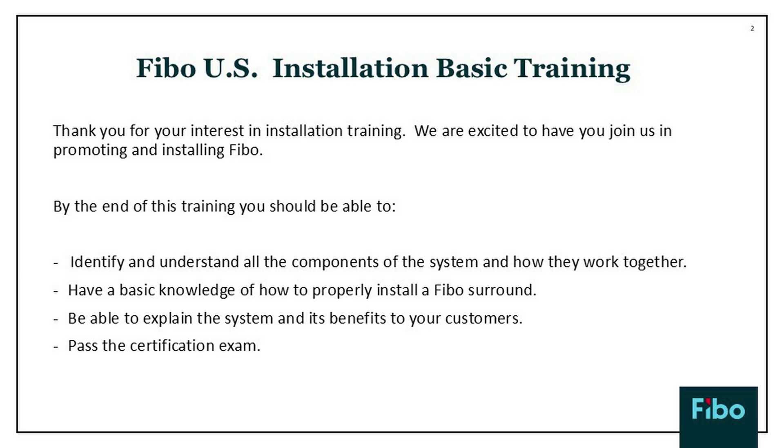My name is Tommy Ellis. I have been the Installation Training Manager for Fibo for North America for about the last 4 years. My experience is in building materials, sales, and installation, and I was also a general contractor in California for 15 years with a focus on kitchen and bath, with experience in all the associated trades.

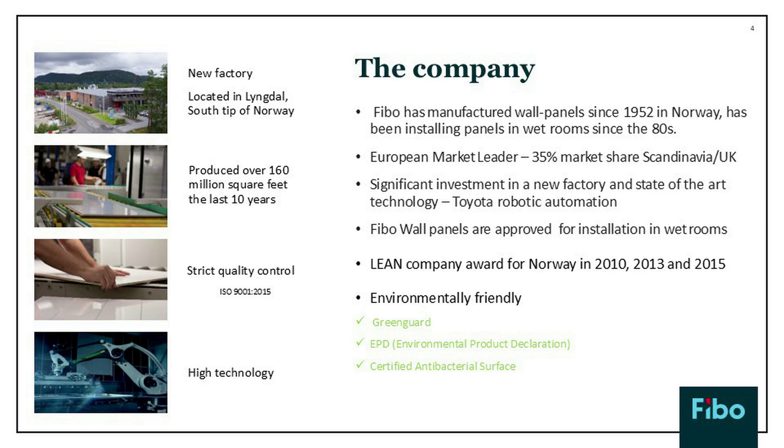Fibo has been manufacturing panels since the early 1950s and started in the wet room space in the mid-1980s. So we have a long history of success in this space with a tried and tested product and system. Fibo is manufactured in Norway in a state-of-the-art robotic manufacturing process, which allows us to produce panels quickly with extreme precision. Fibo has won many awards, is a certified antibacterial surface, and a very sustainable, environmentally friendly product.

Fibo panels are a 3-part construction consisting of an HPL decorative laminate face, 7-ply premium grade birch plywood, and a thin laminate vapor barrier balancing backing. Our panels join with a patented Aqualock click joint and come with a lifetime residential and 25-year commercial warranty. Fibo panels are available in over 600 different colors and design combinations.

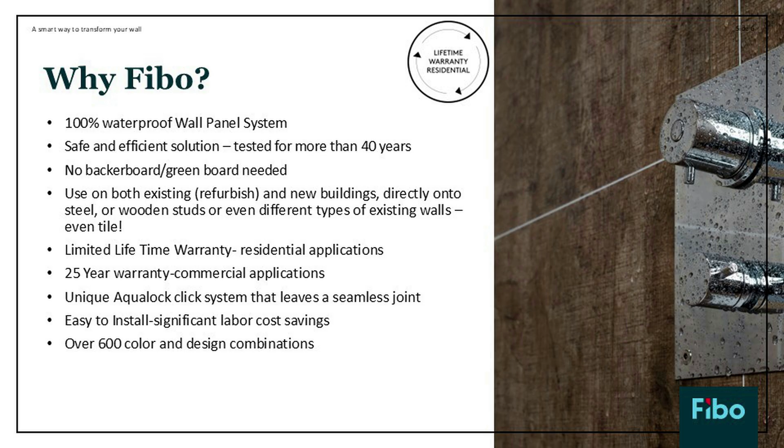Fibo is a 100% waterproof system when installed correctly. We do not require any special waterproof backing to install our panels properly, and Fibo can be installed in new construction, remodels, and over existing surfaces, even tile.

The Fibo system is a complete system. From the panels and profiles to the screws, sealant, and installation accessories, you'll have everything you need in one kit to install our panels. We do not manufacture bases, tubs, niches, and other accessories, as Fibo is designed to work with just about any other manufacturer's product on the market. If you have any questions about compatibility, please contact us and we'll be happy to give you more information.

Our product is primarily designed for wet areas, but can be used on any interior surface, such as a full bathroom wrap, an accent wall, and things of that nature.

Fibo panels are available in a few different sizes. Our standard size panel is 94.5 inches tall by 24 inches wide, available in over 600 decor, finish, and tile design options. We also make a long panel, which is 118 inches tall, available in several decors, finishes, and tile patterns as well. Our tall panel, which is 107 inches tall by 24 inches wide, is available in limited colors and design options.

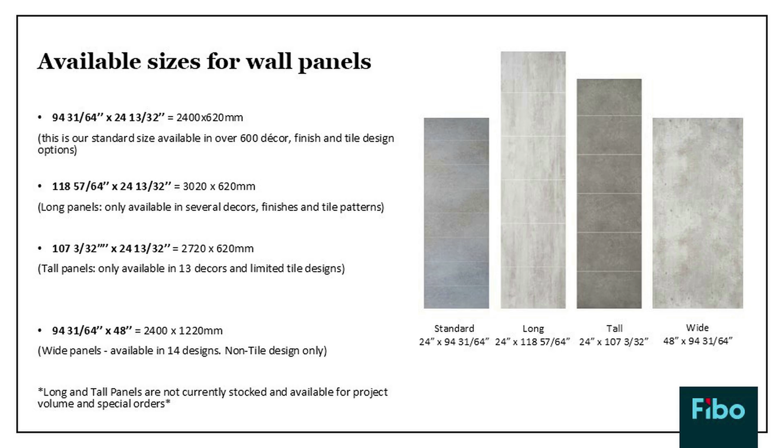Finally, we have our wide panel. This is 94.5 inches tall by 48 inches wide. These are available in 14 designs in a non-tile design only. Our long panels and our tall panels are not currently stocked, but they are available for purchase for project volume and special order. For any questions, please reach out to your Fibo rep and we'll be happy to give you more information.

We also offer a product that we call kitchen board. This is the same panel that we use in showers, cut down to 18 inches tall by the standard 24 inches wide. These panels are designed to be installed as a single course backsplash in the kitchen. If you require taller coverage, our standard panels can be cut to size and shape and used throughout the kitchen. The installation is much simpler, and a typical galley or L-shaped kitchen can be installed in as little as an hour and a half and can also be installed over existing surface.

The kitchen board itself comes in specific colors and designs, so if there is a color that is desired that we do not offer in this size, you can use any standard Fibo panel as I just mentioned and cut it to the size and shape you need. The one limitation for installing Fibo in a kitchen is behind a gas cooktop that has no flame or heat deflection. Please contact us with any questions about this and we can give you additional information.

Before we move on, I want to introduce you to a series of products that we have recently released. These products are designed for the dry room space, and I'm going to show you what these are next. The first panel I want to show you is our Vito wood fiber panel. It has an HPL decorative laminate face, HDF wood fiber core, and a balancing backing. These are standard size panels, very easy to install, and a very stylish alternative to drywall texture and paint. Next is our Vito lacquer veneer panel.

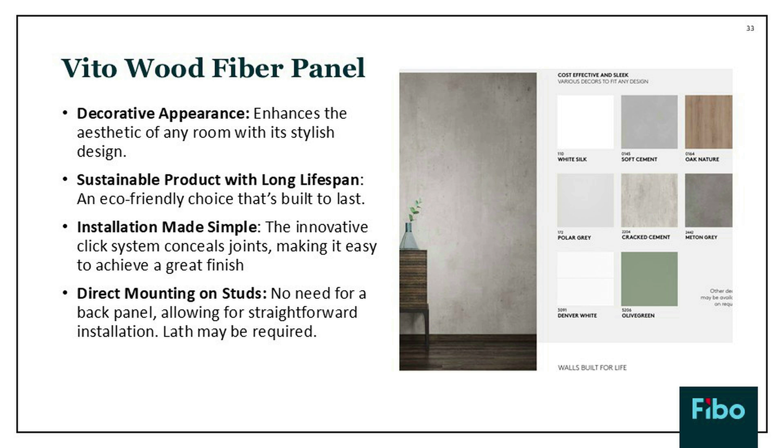These have the same 7-ply birch core as our Fibo panels do, with a true lacquered veneer face. These come in birch, oak, and very soon a light oak veneer. These are also very easy to install and provide a very clean, attractive look. These are available in 24 inches wide by 94, 107, and 119 inches.

Here we have our Vito Just Paint, and this is exactly what it sounds like. It is an HDF panel that installs quickly and easily and can be primed and painted just like drywall, in a much shorter period of time and with considerably less mess to contend with. This is a very cost-effective solution compared to using drywall, texture, and paint.

Finally, we have our Fibo Fire Rated panel. This panel carries the Fibo label because it is also suitable for wet room applications. These are 1/4 inch thick, 24 inches wide by 107 inches tall. They are ASTM E84 Class A fire rated and also rated for use in wet spaces. These are available in select decors currently.

All of our dry room products, including the Fibo fire panel, have a click joint fastening system. However, they are not to be joined or locked with our regular Fibo panels. Any product with the name Vito is only designed for use in a dry space. They are not to be used in any wet area. Our Fibo fire rated panels can, however, be used in a wet space or a dry space.

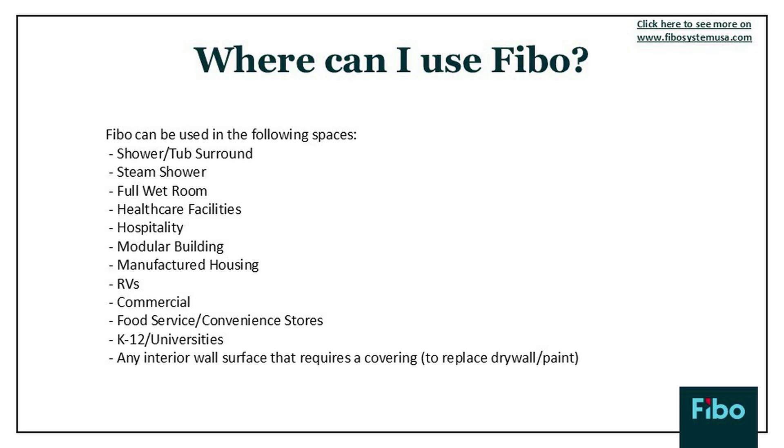If you're going to be using our 48 inch wide panels, we have created a separate video on how to get the maximum yield out of those panels, and you can find that on our YouTube channel as well.

For a symmetrical layout, which is more in line with how a tile installation would look, it will require 7 panels in an alcove of the same size. Typically, you would align the vertical grout line to fall in the center of the drain or plumbing fixtures.

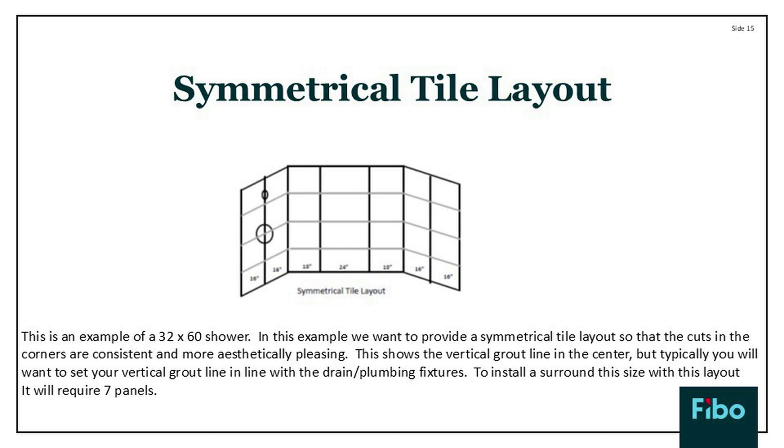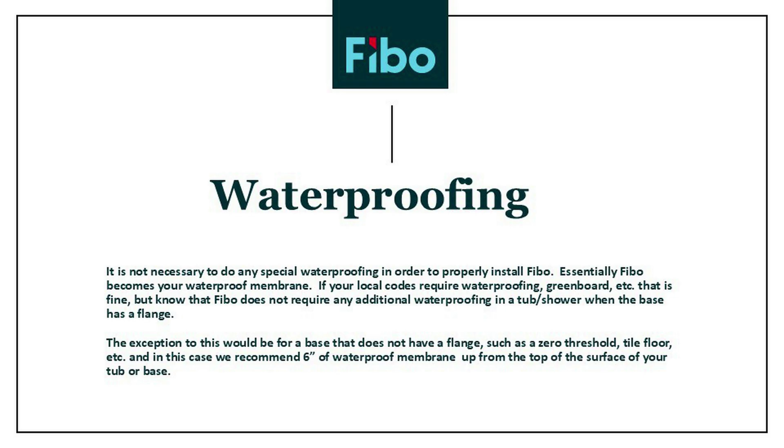Now let's move on to the installation demonstration video. This is about 30 minutes long, and it will cover all of the steps involved in a typical Fibo installation.

So what you need to get started is your Fibo panels, which come in a package of 2. You're going to start with the base profile, hidden corner profile. We've got 2 different sizes of L-shaped finishing profile, the large and the small. These come in white, black, and aluminum.

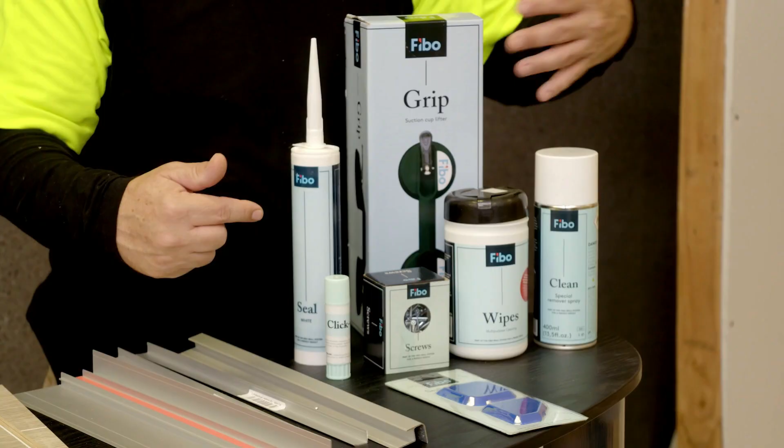If you're going to be wrapping the room and you need to go around a 90-degree corner, we've got an outside corner profile. You're going to need your Fibo seal, click wax, the Fibo screws, the cleaning products, the wipes and the Fibo Clean, our Fibo sealing tools, and then we have our optional Fibo grip.

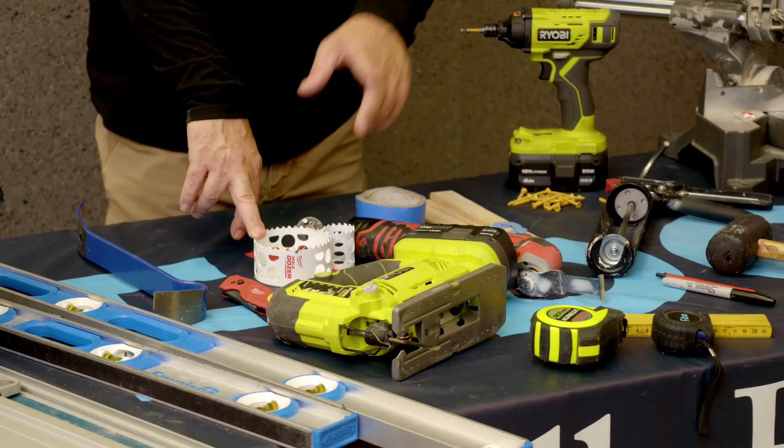To complete your Fibo installation, you're going to need the following tools. We're going to start with your saw, either a track saw or a circular saw with a 60-tooth finish blade. If you're not going to use a track saw, make sure you've got 8-foot and 4-foot clampable straight edges. You're going to need a 2-foot and a 4-foot level, pry bar, a utility knife, a jigsaw and/or a multi-tool, hole saw bits for cutting your pipe penetrations, measuring tools, marking tools, blue tape, and 2 options of shims.

We've got these plastic horseshoe type, and then we've got our standard wood type shims as well. Heavy duty caulking gun, rubber mallet, a drill with a T10 bit, and a bit for your deck screws or whatever wood screws you want to use if you're attaching OSB strips. A chop saw or a hacksaw in order to cut your profiles, and then finally any PPE, ear protection, gloves, eye protection, etc.

Fibo panels are to be stored flat and unopened until you're ready to install them. Acclimation period can vary. If there's an extreme variance in temperature from where the product is stored versus where the product is to be installed, then acclimation time can be as much as 72 hours. If the storage condition and site conditions are similar, this can be less.

Refer to the product installation guide or contact us with any questions you may have regarding this. And always be sure to inspect each panel before installing.

As it pertains to Fibo Seal, appropriate storage temperature is between 41 degrees and 77 degrees Fahrenheit, and application temperature is between 41 degrees and 95 degrees Fahrenheit. Our product data sheet has additional information.

Fibo can be installed over multiple back wall options. Today, we're going to talk about the 2 most common, and that's gluing up over drywall and screwing in over OSB strips horizontally placed across the studs. We can also go over existing surfaces such as tile, other wall surface products as well in a glue up option. That's a separate training, and we'll address that in future broadcasts.

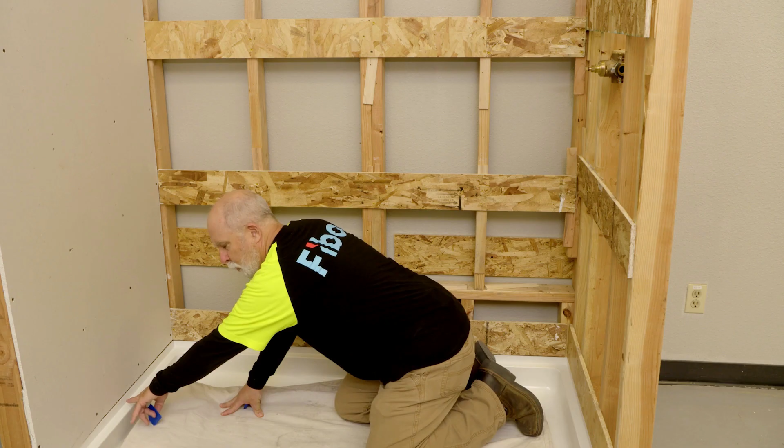When you set your drywall or your OSB strips, we want to be 1/4 of an inch above the flange of your tub or your shower pan. The Fibo sealing tool is 1/4 of an inch thick, so that makes a great spacer to set your material on top of and get that 1/4 of an inch gap.

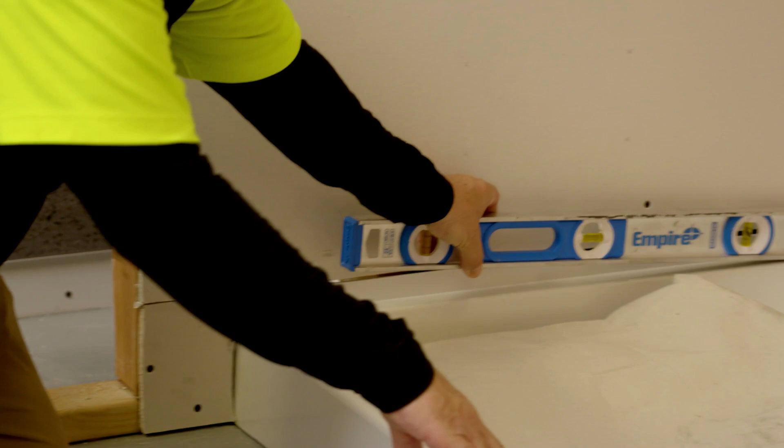First thing you want to do before you get started doing anything is check your base for level and check your walls for plumb. So we want to be as level as we possibly can. This one actually is set really nice, and it doesn't have any particular strange casting in the material either. You may run into a situation where there might be a hump or a little bit of a valley. If that's the case, you're going to want to find your highest spot and level from there.

So I'll check my 3 sides, and everything's good here. So my base is set.

So if you find any unusual outages in your walls, particularly when it's drywall, a lot of the corrections probably need to be done behind the drywall. But when we're gluing it up, if it's a minor variance, we can address that with glue.

With the OSB strips, it's a lot easier to get your walls plumb and flat by taking some shims, putting those in place in your corners, as well as in the field, making sure that everything's nice and flat. Always want to make sure you get 2 screws in each of your OSB strips.

Here we framed out for a niche. We're going to introduce a niche into this installation training as well. So I've got my bottom support, I've got my top support, and it's going to fit right in between the studs, and we'll address that later on in this demonstration.

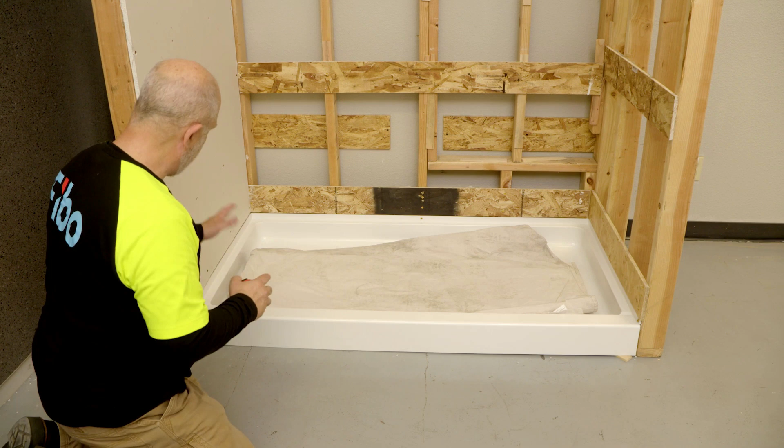Now we want to measure and cut our base profiles. I've got a couple of different options of how the Fibo is going to end. On this wall, I'm actually going to run it long and put a dog leg. On that end, we're going to stop right at the end of the shower base, but the base profile is still going to go in this installation. It's going to end at the same place in both locations, so I'm basically just going to take my measurements to the end of the shower base, and I'll take those over to the saw and cut my profiles on 45-degree angles in the corner.

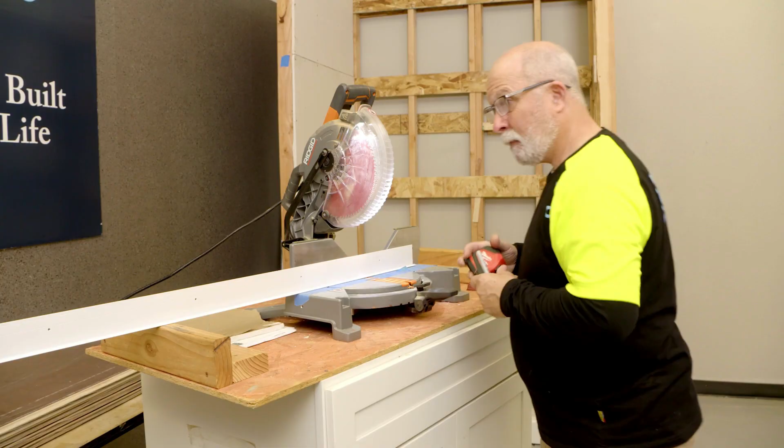Now that we have our measurements, we'll go ahead and cut our base profile. And there's my 45. Okay, so now we'll go ahead and dry fit the base profiles that we just cut, just set them in place to get started.

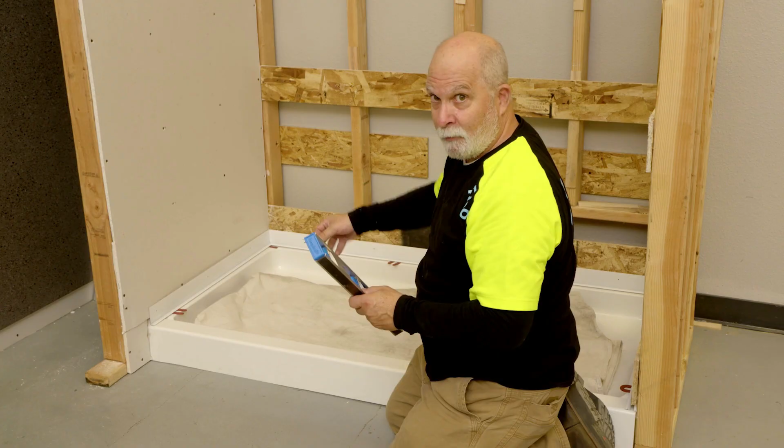We want our base profile to be 1/8 of an inch minimum off the deck of whatever surface we're working on top of. We're going to use these horseshoe shims that are 1/8 of an inch thick, and I'm going to put these under the base profile all the way around. Once those are in place, then we'll do another check of level all the way around and make any adjustments with 1/16 of an inch shims if necessary to make it perfectly flat.

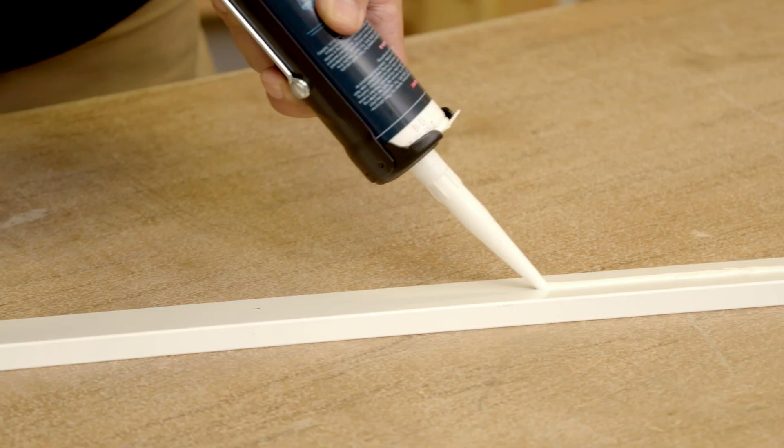After the profile's been dry fit and you're comfortable with the way everything sits, as we get ready to install it, we're going to apply a bead of Fibo seal to the back of this base profile, right below the screw lines that are pre-drilled into the profile itself. What this is going to do, in the event of any potential wicking that could happen down the road, is help prevent water from getting into the base material behind the Fibo panels.

So after we've applied our Fibo seal to the back of the profile, we'll go ahead and set it back down in place on top of the shims that we left from when we leveled out the base profile the first time, and just stick it to the wall. We're only going to put one screw in the bottom of the base profile to start, on the wall that we're starting on, and that's to hold the base profile in place.

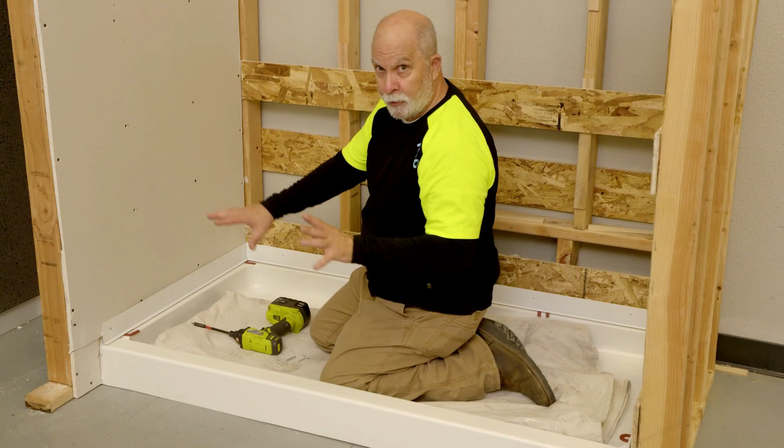Some of the instructions say to put all the screws in all at once. You'll find out as we go through the course of the installation, we're going to add additional screws through the bottom of the base profile through the panels. So installing all of the screws all at once is not necessary, and if for some reason you need a little bit of flexibility as you're going through the installation, leaving the ends of the profile loose is helpful to make any adjustments that you might need to make.

You definitely want to put your bead of Fibo seal along the back of each piece, set it back up against the wall and leave it resting on the shims, and then you can make adjustments, like I said, as you go through the course of the installation.

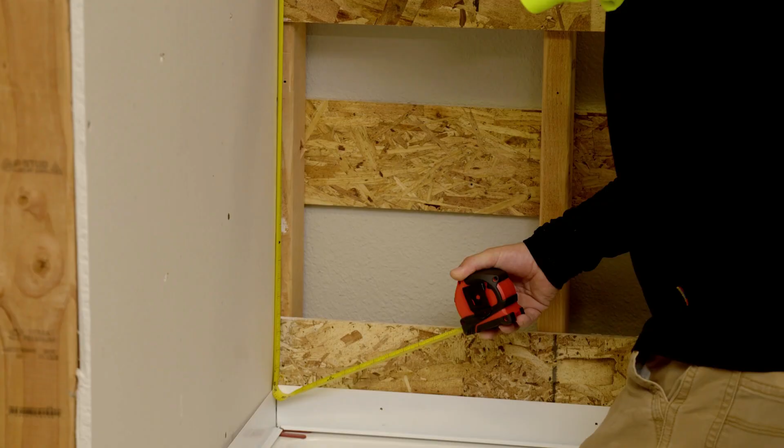Okay, so the hidden inside corner profile is going to go up next. To measure that, we're going to go from the top of our installation and measure all the way down to the top of the base profile where it sets flat on the wall. You want to take that number and subtract 1/4 of an inch. The reason for that is we want to leave an 1/8 of an inch gap at the bottom, and an 1/8 of an inch gap at the top. What that's going to do is if there's any flex in your shower pan or tub, when it moves up and down under weight, the metal won't bind once the product's installed.

After we've cut our hidden corner profiles, we're going to talk about orientation of the installation. Today I'm going to do a left to right installation, and the way the profiles get installed depends on which direction you're going. As you can see, I've got the tape on one side and the channel on the other. I always want the tape to be on the side of the corner in the direction that I'm going. In this case, going left to right, if I put my profile up here in the corner, the tape is to the left of the corner. It's going to be the same thing on the opposite side, where my tape is left of the corner.

If we want to go right to left, we're simply going to flip these things around upside down and put them in backwards. So if I were starting on this wall, going right to left, now my tape is on the right.

And that's what your profiles would look like in the corner. There's a third option, a back wall first option, and in that instance we want our two pieces of tape facing inward towards each other. So for a back wall installation, that's basically what it's going to look like.

Keep in mind, if you're starting with a back wall first installation, it requires you to flip a panel over 180 degrees to get the click joint to line up properly. That's not possible with every panel we make, in particular the subway, hex, and chevron patterns—you cannot reverse direction. So if you're using one of those designs, make sure you go in one continuous direction, whether left to right or right to left, continuous direction in the alcove as well as around the entire room.

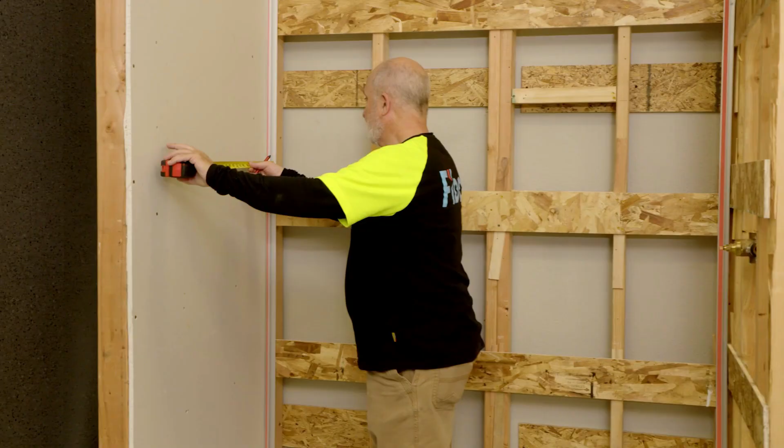So then I'll take that and come over here to this wall and make my mark on 15.5. That's where the two panels are going to lock together. So then to determine the size of my first panel, I'm going to go to the end of my installation, which I've decided is going to come out 3 inches from here.

Put a mark on the wall, and then I want to make a plumb line all the way up the wall to represent where the end of this panel is going to land. And then I can measure from my mark to my line, and that'll give me the size of the first panel that I'm going to cut.

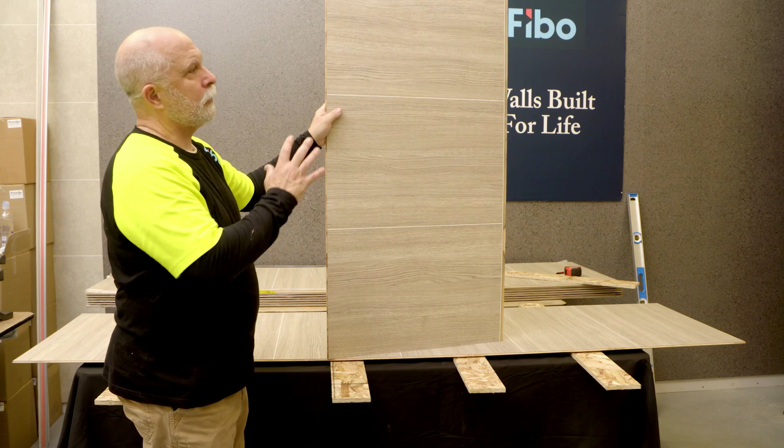Let's talk about the orientation of the board real quick. We're doing a left to right installation. Each panel, when it comes out of the package, has a short side or tongue side, and a long side or groove side.

The groove side, or the nailing side, is the side we always want to be on the wall in the direction we're installing. Since we're going from left to right, I always want to make sure my nailing lip, my groove side, is on my right-hand side. That would make this the bottom, that would make that the top.

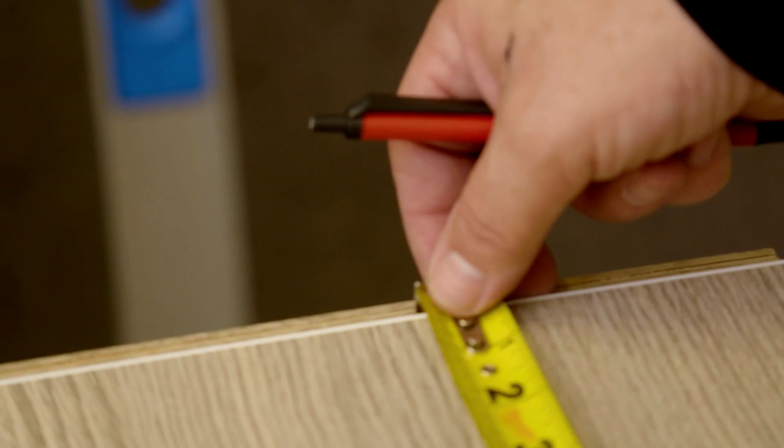Whenever you're measuring a panel to cut, you always want to measure from the laminate edge and not from the actual end of the panel, including the aqualock. So we'll start from the laminate edge on the groove side, and make our mark accordingly on the opposite end.

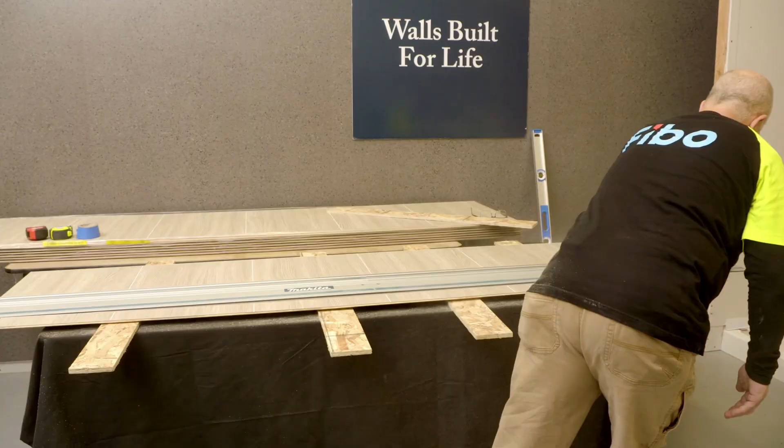Now that our first panel is cut, we're going to go ahead and set it in place and dry fit it. Fibo grip works really well on these wide format tile panels. Set the panel on top of the base profile, line it up with my line, and then double check the panel for plumb.

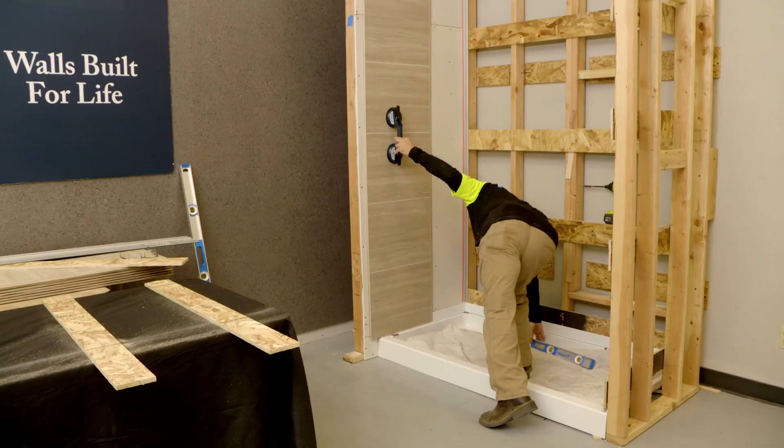Once I have my panel set plumb, since we're gluing this up over drywall, we're going to go ahead and draw a straight line all the way down the end of the panel. We'll take the panel off, we'll seal that, and then we'll apply the glue using this line that we drew here to give us a stop guide. Now we're ready to permanently install the panel.

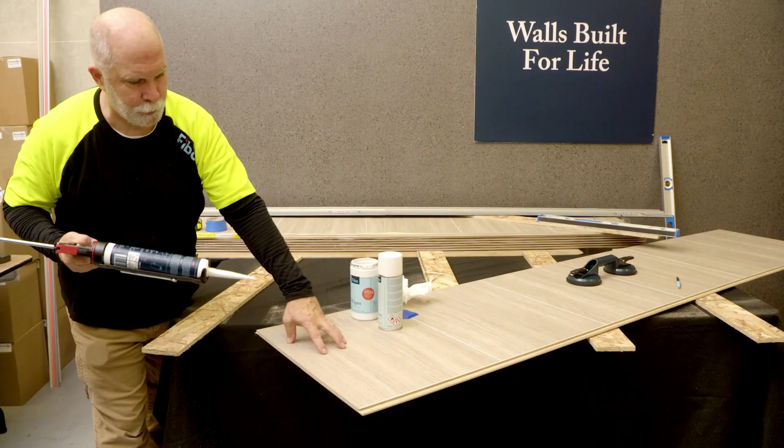For the first panel only, we're going to seal the bottom of the panel with Fibo Seal. You don't need to use a lot, but we want to make sure that the grain gets completely covered. So you apply a thin bead to the bottom, and then you can take your Fibo sealing tool to smash it out. I prefer to use my finger, whichever way works best for you. You want to just make sure that that grain is completely covered.

If you get any excess Fibo Seal on the surface of the panel, you can just take your Fibo Clean, spray the bottom, scrape it away with the sealing tool, and if necessary, you can finish it off and clean any other residue with a Fibo wipe. I do want to stress that it is important to clean up any excess sealant as you go, as opposed to waiting until the end of the installation, because it will get messy as you start working your way around. So it's always best to clean up every panel as you go.

For applying glue to the wall, I have cut a 1/4 inch tip on the nozzle of my Fibo Seal tube and will apply Fibo Seal as my glue in an S pattern, top to bottom, with 12 inches in between the horizontal beads. With this type of application, you should use about half a tube of sealant or glue per 24-inch wide standard height panel. Larger size panels will require more glue.

Fibo Seal is a very strong construction adhesive. However, if you have a preferred construction adhesive, you may use it, but you may only use it as an adhesive. If you're unsure about compatibility, please contact us so we can help you with that. Okay.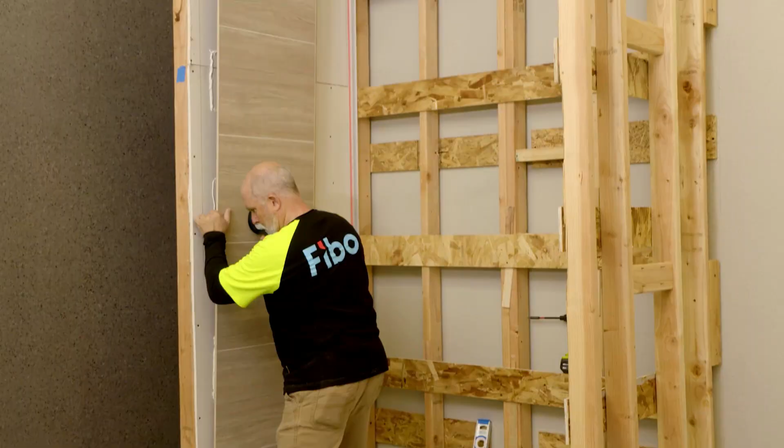Make sure the panel's plumb and push it into the glue. Next, we want to put face screws in the ends of the Fibo panel. We're also going to run one through the bottom, through the base profile, to hold the panel in place while the glue dries. It's also going to give us some external leverage when we go to click in the next panel.

One thing you want to make certain of when you're coming into the field of the Fibo panel with a screw is that you don't come in any further than 1/4 of an inch. It'll get covered with an L-shaped profile. The small L profile is 1/2 inch long, and it'll cover that screw head. Double check and make sure my panel didn't wiggle.

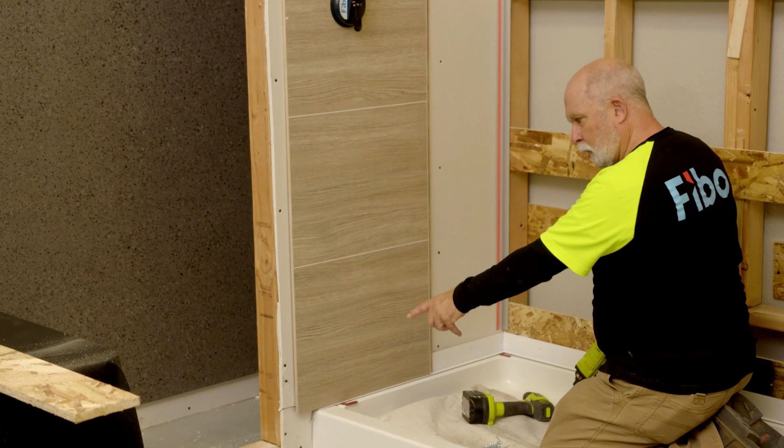Remember when we installed the base profile, we put one screw in the end of it. I'm going to put a second screw through the base profile now, into the nailing lip, through the base profile, into the wall.

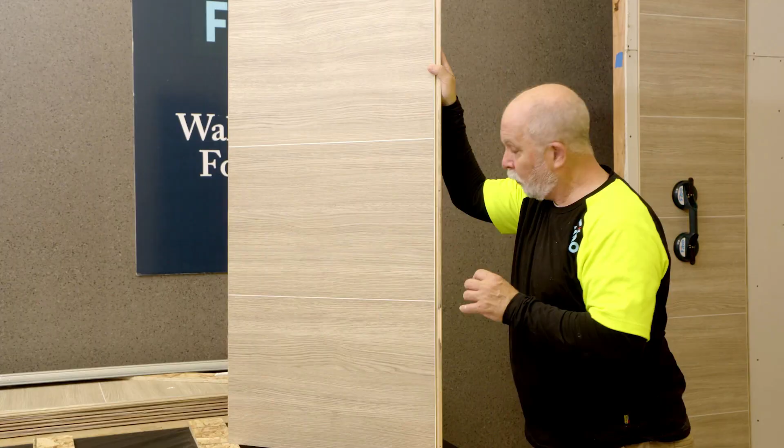When you're putting screws into the panels through the Fibo Aqualock joint, there's only one place the screw goes. And as you can see, we've got a milled line right here in the Aqualock joint. That is your screw line. As you can see by the empty hole that I've got here, I've got another one down at the bottom. Do not put the screws in the flat part. If you do that, the panels will not click together. So you always want to make sure that you go through this milled line on the nailing side.

Screws will self-tap themselves and the heads will sink themselves, so you don't need to overdrive them. The panels will close just fine, flush right up against the tongue here. Okay, so we've got our screws on the end, we've got our screw in the bottom through the base profile, and I'm just going to go ahead and put one screw in the top. Again, I don't need to worry about where my studs are because I've got a top plate up here.

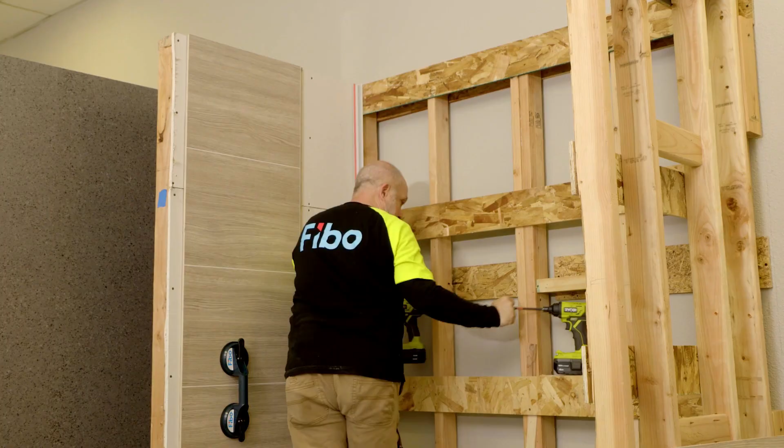I'll pre-drill my hole. Drive the screw. Now this panel's set. It's not going to move while the glue's drying, and I can go ahead and move on to the next panel.

Now that our first panel is in place, we're ready to measure and cut our second piece going into the corner. Where we measure from is from the pin, what we call it on the hidden profile, this little piece of metal that's sticking out. That's where the end of the Fibo panel is going to land. So you want to measure from the pin to the laminate edge of your panel to determine what your panel size is going to be.

Show it the other way. You can measure from here to there as well, either way. You want to measure the bottom, the middle, and the top to come up with your finished panel size going into the corner. Sometimes I'll give myself about a 1/16 of an inch relief going into the corner just to ensure that everything fits. So for measuring the second panel, you want to measure again from the laminate edge. In this case, this is the side that is going into the panel that's already on the wall, so we want to measure from this side to our end cut, wherever that ends up being.

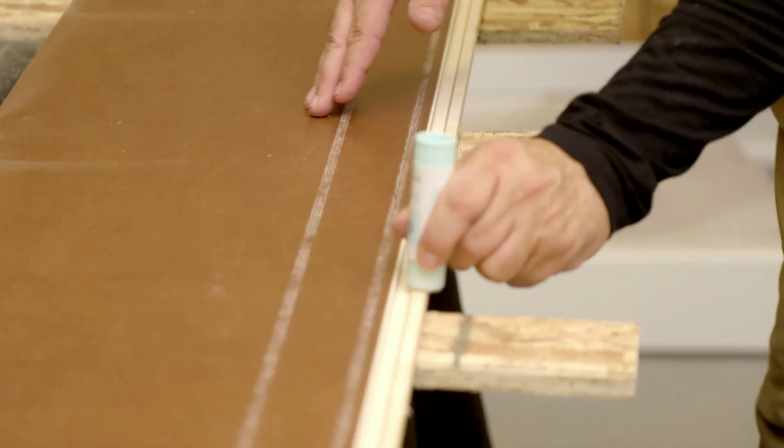So in the things you need to install, Fibo Click Wax is one of them. What we do with that is we flip the board over, and on the back of the tongue side, we're going to apply this wax. You can use the Fibo Click Wax, you can use a candle, you can use any hard wax basically. What we want to do is lubricate the back of the click joint, and it makes the panels go together a little bit easier. You don't need a lot, just enough to get a nice thin layer on the panel itself.

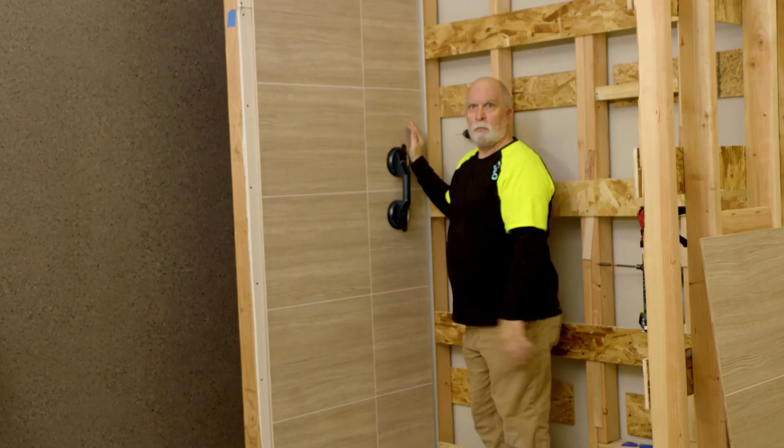Now we're ready to dry fit our next panel. You want to introduce the panel at about a 45-degree angle, getting into the click joint. Line up your grout lines, and then just a little bit of wiggle, and the panel locks in place. Now that we know that it's dry fit, everything fits perfect along the corner, top and bottom, we're all good. We take the panel out, apply the sealant to the bottom, to the corner, and we're also going to apply Fibo seal into the click joint.

Now that the panel's dry fit, we're going to seal the end that goes into the corner. We're going to seal the bottom, and we've already gotten this one started, so we're going to finish here along the back side. We're going to finish along the bottom as well, and we're going to clean those up real nice, make sure the grain's good and covered.

Before we seal the click joint, if I'm working by myself, I want to put my glue on the wall first before I do anything else. If I put the sealant on the click joint and then go to put my glue on the wall, I gotta take a phone call, it's been 10 or 15 minutes, this could start to skin over before I'm ready to put the panel in. So I always want the sealant in the click joint to be the freshest sealant I've applied anywhere. So now I'll go ahead and put the glue on the wall. Once that's done, we'll go through how to seal the click joint properly.

Now that we've got our glue on the wall, we can go ahead and peel the protective film off the double-sided tape on the hidden corner profile. This tape is going to hold the panel in place while the glue dries behind the panel.

All right, now we're ready to seal the click joint for our second panel. There's one place and one place only that the sealant goes, and that is in the tongue side or the short side, right next to the laminate. We're going to fill this gap completely full of Fibo seal. We don't want to be chintzy with the Fibo seal this time. We want to be very generous because we want a nice full joint to waterproof the two panels when they click together.

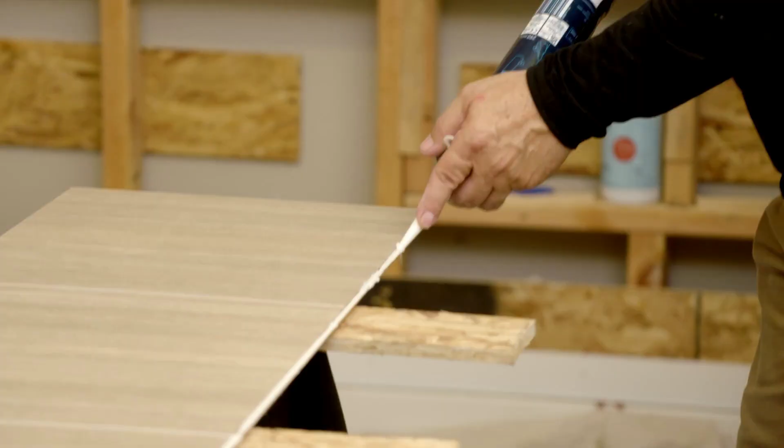Now that we've got our Fibo seal applied into our Aqualock joint, we're not going to touch it. We're going to leave it the way it is, and we're going to bring it into the installation, and we're going to install it just as we dry fit. And you want to give it some lateral pressure into the joint. You want to start seeing Fibo seal start to ooze out the entire length of the panel. Line up your grout joint.

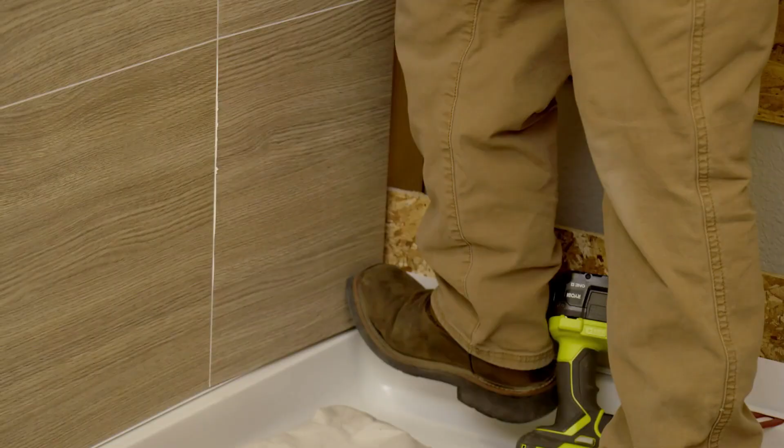Sometimes the Fibo seal will offer a little resistance when you're trying to click the panels together. So make sure that you're fully engaged into the joint. A little foot pressure on the bottom of the panel, and just wiggle the panel until it locks into place. Once it locks into place, push it into the tape all the way up the panel, and then we'll clean the Fibo seal and move on to the next panel.

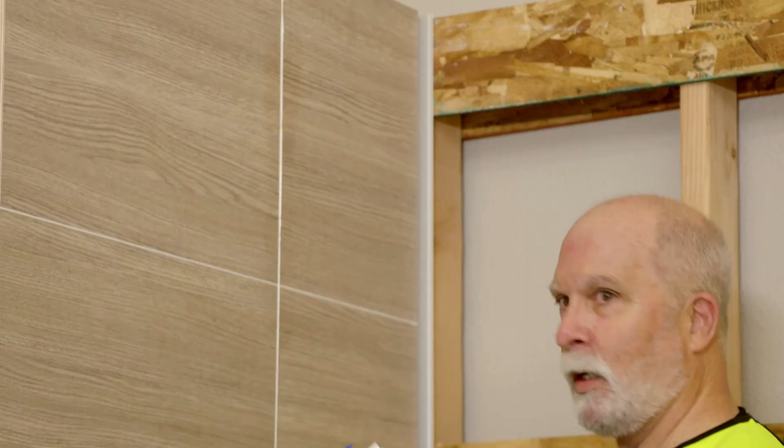So now we'll remove the excess Fibo seal from the Fibo Aqualock joint. First thing we're going to do is spray with Fibo Clean. This stuff does evaporate pretty quick, so only spray as far as you're going to be able to drag your tool down. We'll take the Fibo sealing tool and basically just scrape away the Fibo seal. And we're going to do that all the way down the unit. And then we'll come back with a Fibo wipe and wipe away any excess Fibo seal.

So the Fibo wipes can leave a little bit of haze, particularly on a matte finish. So the last thing you want to do when you're cleaning your joint is take a little bit of Fibo Clean, spray it on a paper towel, and then just buff that haze away. Again, you can wait until the end of the job and do it later, but it's a lot easier to do while it's fresh. So again, I'm going to reiterate, clean up everything as you go rather than waiting till the end. It's just going to make it a lot easier on you if you do it that way.

Okay, so now we're ready to get started on the back wall, which we're also going to transition to OSB strips over studs. So this is going to be a screw-in portion of the installation. All of the steps that we follow, they're going to be the same regardless of whether you're gluing it up or screwing it in. But just make note that we are going to be using screws on our OSB strips as we install these.

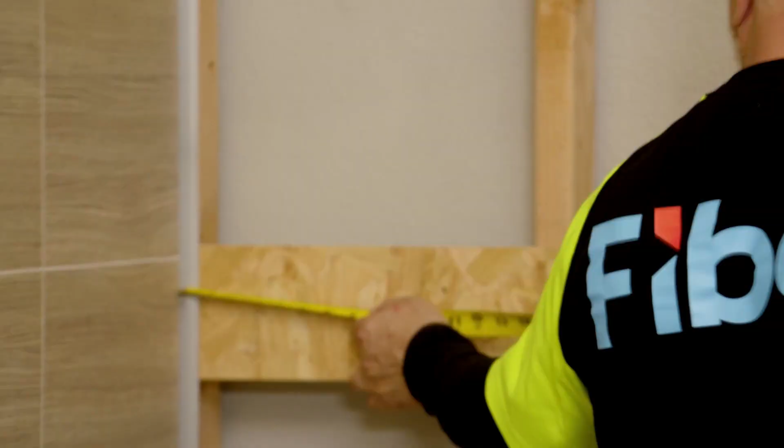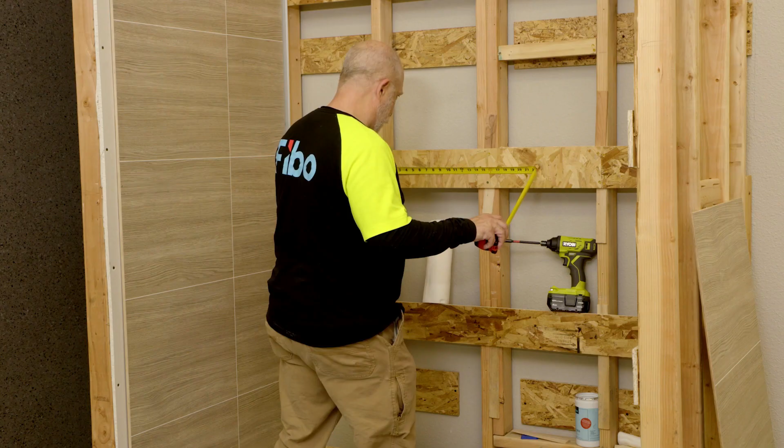Since I'm doing a tile design and I'm doing a symmetrical pattern, making sure that my cuts are even on both sides, the first thing I need to do is find the middle of the wall. So I'll run my tape measure all the way across, find the middle of the wall and mark it. So I got the middle of my wall. I know that that's where the center of a full panel is going to be. I'll go ahead and measure the center of that. If you're using metric, the panel is 60 centimeters across. If you're using imperial, it's 23 5/8 inches across for the laminate surface itself. So I'm going to figure out where the center of that is and make my marks accordingly. So that's where the end of my first panel is going to land.

When I measure this panel, if you remember that the hidden corner profile has an F channel, it's got a little channel that goes into the back. And it's going to come in back behind the panel, just like that, by about 1/4 of an inch. So when you're measuring this panel, if you don't have a stick like the one I have and you're just using a tape measure to the face of the panel, remember to add 1/4 of an inch to the end of that dimension, and that'll give you your panel size.

Okay, so we already measured and laid out for our panels. The first panel, I've already cut it, I dry fit it, I put my sealant on the long edge. I also put my sealant on the bottom of the panel as well, so that my panel is fully sealed. I checked my level for plumb in the corner, made sure everything was straight. And as you can see, I've got 2 screws in the nailing lip in each OSB strip all the way down.

Before I started, I put my first screw into the corner of the base profile. And since we're only starting with 1 screw per run to get started, I'm gonna go ahead and drive my last screw right through the nailing lip into the base profile.

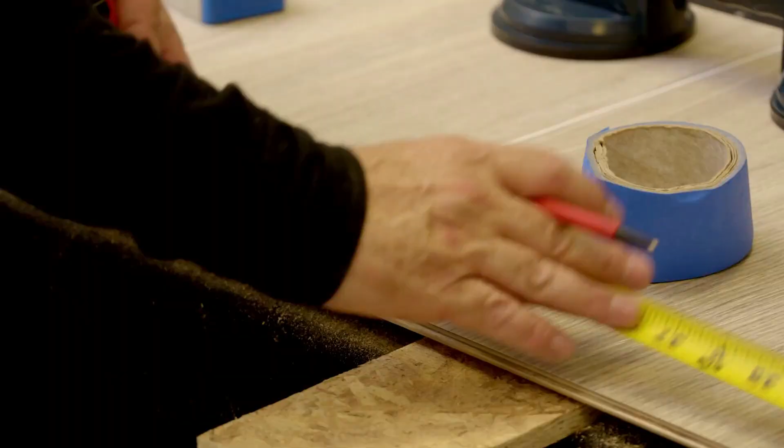Second panel is installed. We've already cut the 2 panels together for our niche layout, so we don't need to worry about that. We want to measure from the pin to the laminate, just like we did on this back wall over here. Don't measure it all the way to the wall, because remember, this panel on this side is going to slide behind the panel adjacent to it into the channel of the hidden corner profile. So we'll just take our measurement from here. Again, top, middle, and bottom. Transfer those marks to the panel, cut it, dry fit it, and install the panel.

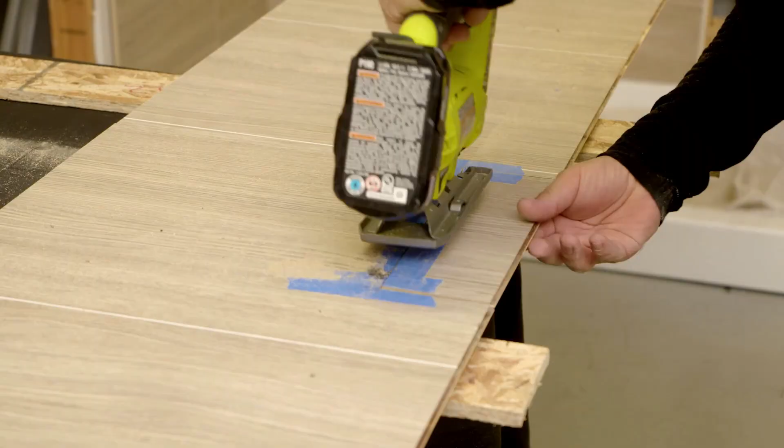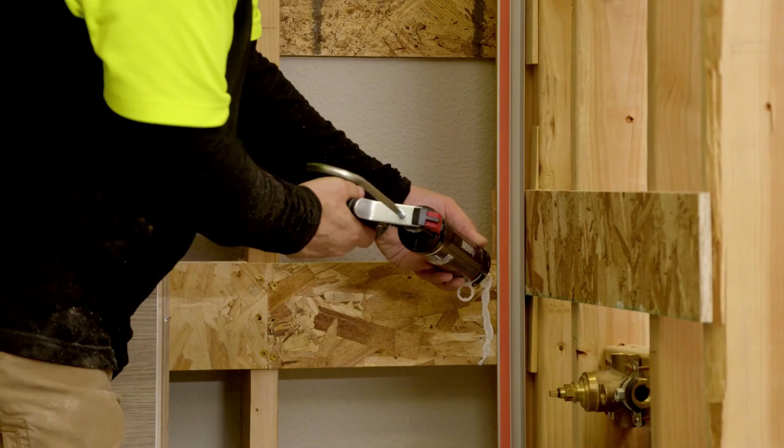Okay, so I've already cut and dry fit the panel that's going to go here. Next step that I need to do is on the OSB strips, I want to run a bead of Fibo Seal right next to the hidden profile, because we're not putting any glue or screws into the corner of this panel. We need something to hold the panel to the wall, not just relying on the strength of the tape. So what the tape will do is it's going to hold the panel in place while the glue dries. This glue is going to become our permanent adhesive to set the panel in place.

So now I can go ahead and put my last screw into the base profile into the corner. So now in combination with the screw that I started with, the 2 screws in the bottom of each panel going so far, and this panel in the corner, I've got plenty of mechanical fastening of the base profile for the installation.

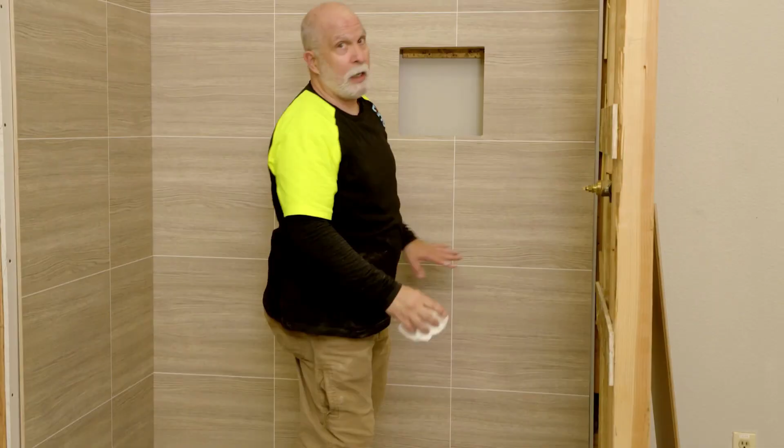Okay, so the panel's been sealed, everything's been put together. I used my Fibo Clean and my scrapers to get the residue out of the click joint. I did it for the other panel as well. Now I'm just removing that residual haze from the Fibo wipes. This panel's now set, and I'm ready to move on to the next wall.

So what I did here, as you can see, I've got 2 panels clicked together, just like I did when I cut out for the niche. Did the same thing with my 2 plumbing wall pieces. This piece here is the first one that's going to go into the corner. This next piece I'll cut after I've got my holes drilled.

You just saw me measure and mark my plumbing locations in the grout line. That's because this grout line is going to land dead center of where the plumbing controls are. So I only need to make my marks vertically. I don't need to worry about which way they're coming over, because I already know it's going to be right there where my grout line is. So we'll go ahead and get these holes cut, and dry fit and install this next panel.

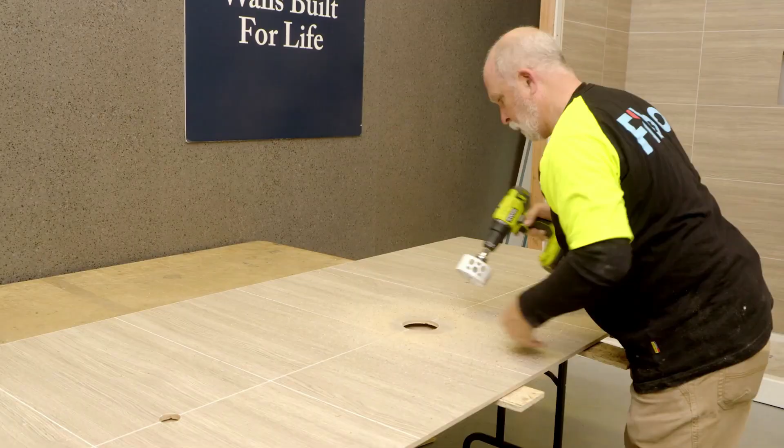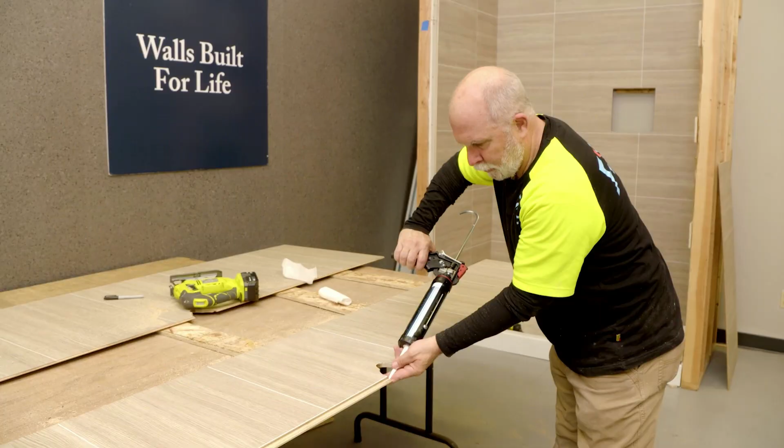Any cut that we make into a Fibo panel, we need to seal with Fibo Seal, just like we did for the corner of the panel, just like we do on the bottom. Any other place where we cut the material, we want to make sure we apply Fibo Seal as well. And it's the same basic operation of applying the Fibo Seal to the cut surface and then making sure that that cut surface is completely covered with the Fibo Seal to waterproof the panel 100%.

And again, you can use the Fibo sealing tool, you can use your finger, what have you. I prefer to use my finger, but be careful because the laminate edges are sharp. So be careful not to cut your fingers.

And then we'll spray this down with some Fibo Clean, get rid of the excess Fibo Seal. We'll do the same thing to the hole here. We're also going to do the same operation to the niche, but I'm going to actually seal that cut opening as we're putting the niche in. So we'll get to that in just a minute.

Okay, so my next panel, it goes into the channel behind this panel into the hidden corner profile, making sure that my grout lines are lined up in the corner. And then I'm also going to double check again and make sure that this panel is plumb, which it is. So I'll go ahead and put my 2 screws into each strip. Again, making sure I get my last screw into the bottom of the base profile.

So our last panel is in place, and we'll give it our final clean again to remove that haze and whatnot. And we're going to run our face screws on the end of this panel the same way we did the panel on the other side. And we'll just go ahead and pre-drill those holes. Remember, when you're going into the face of the Fibo, you don't want to come any further in than 1/4 inch.

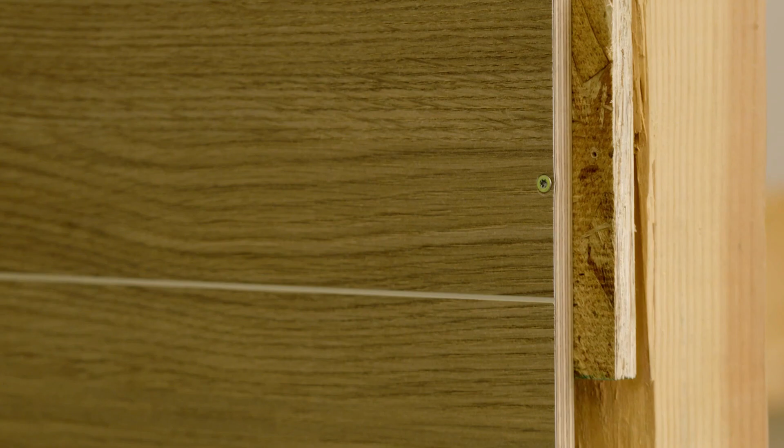In case I neglected to mention with the first panel, and as a review, when adding face screws to the end panel, 1 screw per OSB strip or 5 screws evenly spaced is sufficient. If you're going over drywall, it is best practice to place a stud at the location where the panels will end. This will give the screws something stronger to bite into.

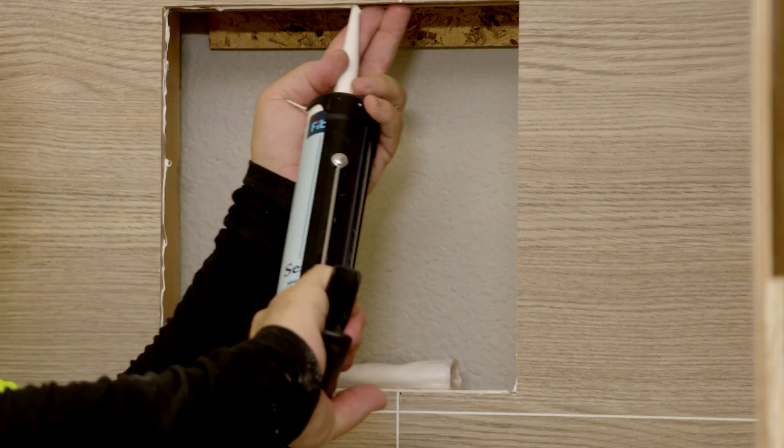Okay, so now we're ready to put in the niche. I've already got my opening. As I mentioned, we need to seal all the cut surfaces, so I'm going to go ahead and do that now. And it's the same operation that I've been doing for every other cut surface throughout the installation. And that's just apply a thin bead of Fibo Seal to lock moisture out of the core material. You can use the Fibo sealing tool or your fingers, again, whatever works best for you.

The goal is that the grain is completely covered all the way around. If you need to add more, add more. If you have too much, that's okay. Just make sure you clean away any excess residue. We will also use Fibo Seal as our glue around the opening on all sides to attach the niche to the panels and to secure it in place. And we'll just take the niche and we'll press it into the Fibo Seal.

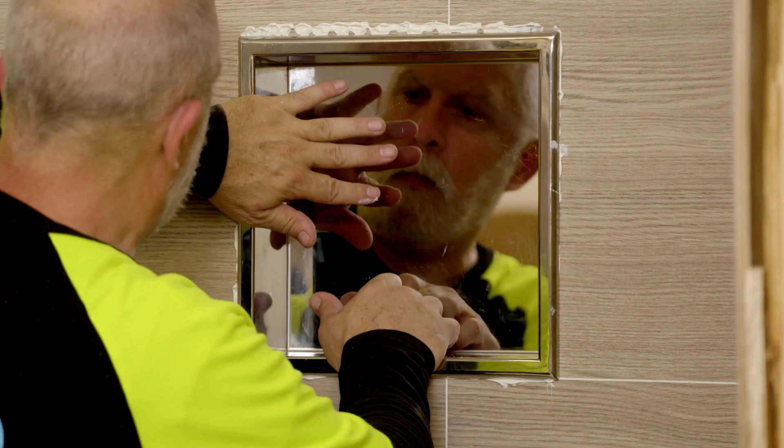With the excess Fibo Seal around the outside, we're just going to do the same thing we've done with everything else. Just going to spray it down with Fibo Clean. You can take the Fibo sealing tool and use it as a scraper and just remove that excess residue. And this will permanently glue your niche into the opening. You may also find it helpful to use blue tape to hold the niche in place while the Fibo Seal is drying.

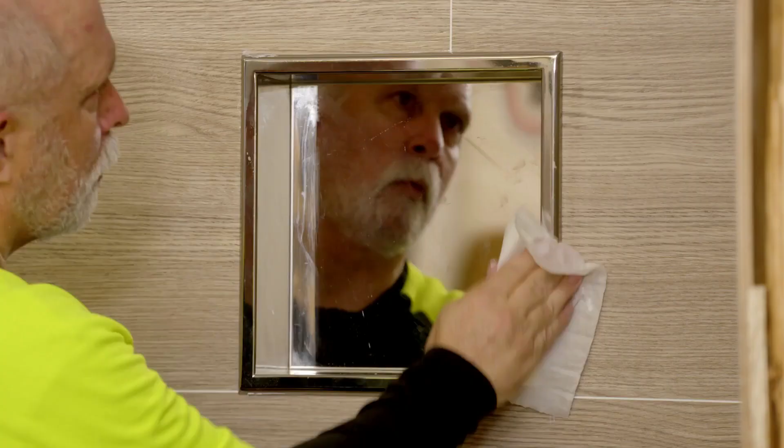Okay, so what I want to talk about now is running your panels either flush with the end of the base, or if we're going to run it beyond the length of the base, we're usually going to need to cover the bottom of the wall. We can do that with Fibo in a couple of different ways. The easiest way, without having to cut the bottom of the panels, is to just basically take a small piece of material and glue it in place.

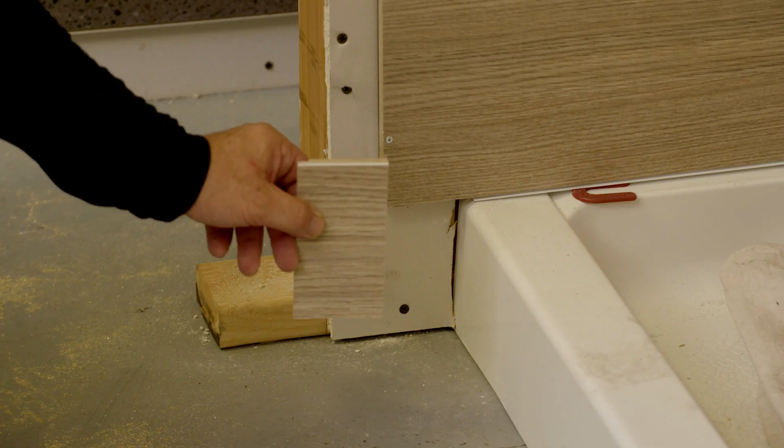What you can see here is that I cut the panel right along the horizontal grout line, so that when I put my 2 pieces in place, just like that, and glue it in, it looks like a natural extension of the panel. We'll apply Fibo Seal on the end and on the bottom, just like we do with everything else, and then we'll just put a big application of glue on the bottom, and we'll glue this panel in place, and we'll put a couple of shims underneath of it to hold it in place while the glue dries.

The other option for a dog leg is to actually cut the dog leg into your panel. And as you can see, what we've done here is we've got the dog leg down on the bottom, and then we had to cut the bottom of the panel. And if you do that this way, you're going to have to cut the bottom of the panel all the way around the installation. So you're going to lose whatever the height of your curb is all the way around the installation.

So if you want to be able to use the full length of the panel, doing the gluing way that I showed you before is the best way to do that. But this basically is just going to fit just like so on top of the base profile when you set your first panel in place.

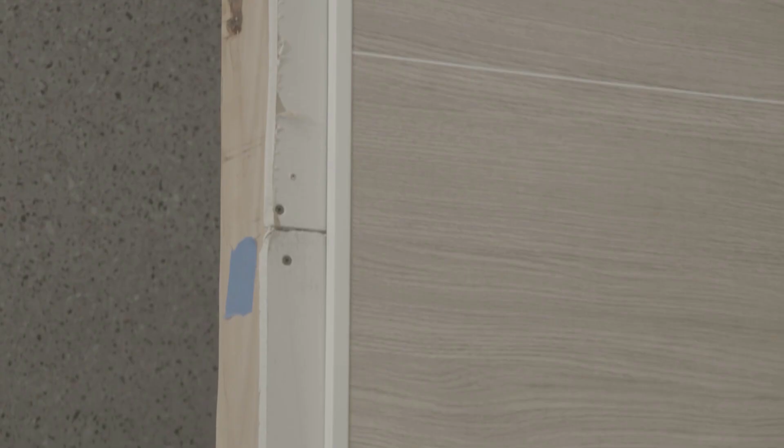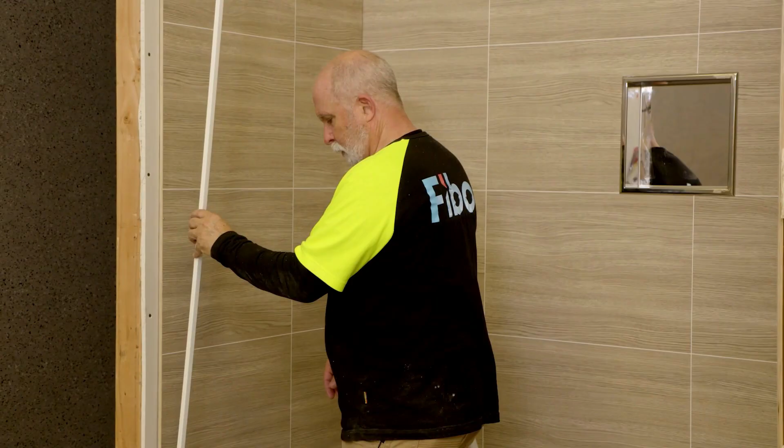The L profile is going to be used as our finished trim to cover the ends of the panels along the ends and the top. Simply measure and cut to size, then using Fibo Seal inside the corner of the profile, stick the profiles to the wall and make sure it's adhered to the panels all the way from top to bottom. You want to run a continuous bead of Fibo Seal all along the length of your profile to make sure it sticks well. You can use Fibo Clean and the sealing tool to remove any sealant that may squeeze out beyond the profile.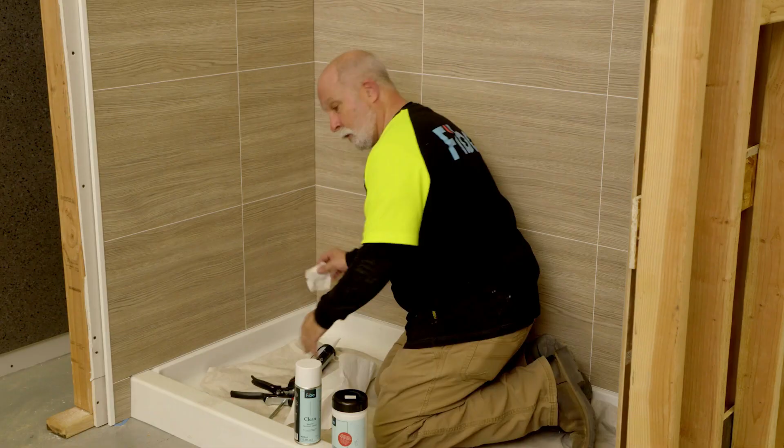The last thing we have to do after our trim is up and everything else is done is seal the bottom and seal the corners. First, make sure your surface is nice and clean. Take a Fibo wipe and clean the surface real good. Then we're going to seal this profile in two places: one where the panel rests on the base profile, and there's also room for sealant on the bottom, and we'll do that in two operations.

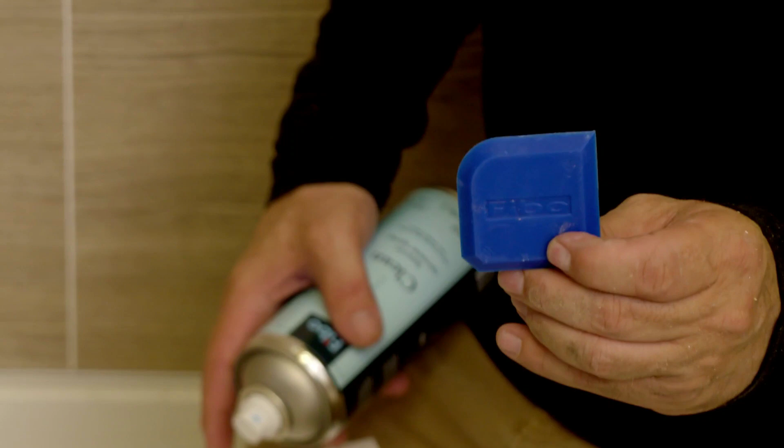Then you take your Fibo Clean. Anytime you're going to touch your Fibo Seal with your fingers, a tool, or what have you, always make sure you spray it first. The sealing tool we're going to use is this square one with a 90-degree edge on it, for when we scrape the bottom of the panels. So we'll spray it real good, spray the back of the Fibo pad. If you need to go over it a couple of times, that's quite all right. You can spray this several times, it's not going to affect the sealant property. Do it as many times as it takes to get it nice, clean, and full.

Then we'll do the same thing where the base profile sits on the shower pan. And since we did the dog leg on this one, we'll also put some Fibo Seal there.

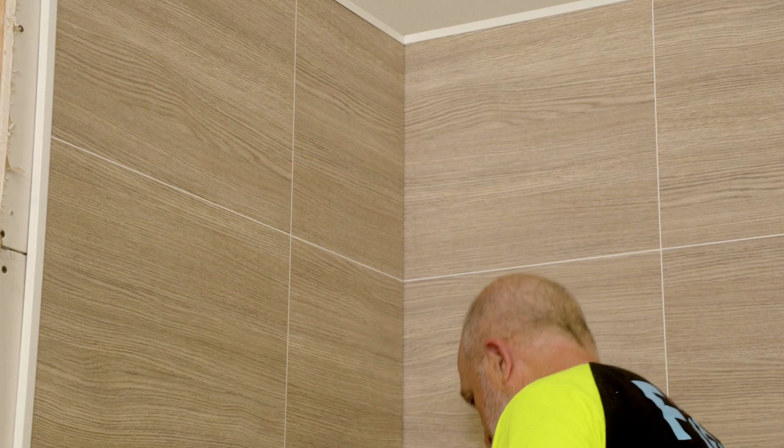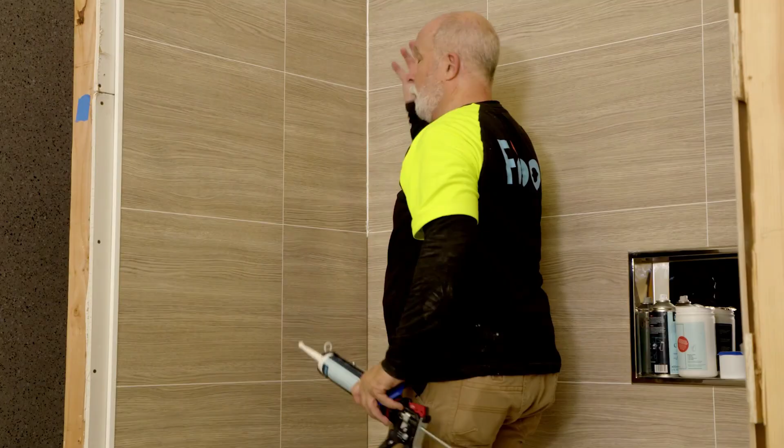Just like we did at the bottom, we'll clean the corner and make sure all the debris is gone so that the Fibo Seal sticks, giving us nice clean sealant going into the joint. We're going to apply this in the corner the same way we did at the bottom, and you want to get the joint nice and full. You can apply the joint all the way, or do it as you go. Either way is fine, as long as the joint gets full completely.

I'm going to go ahead and stop at 2 tiles and show you the cleanup process and the tooling of the joint next.

For this corner, we're going to use a different tool, the Fibo sealing tool that looks like a home plate. This one's got a number 5 on it, and this is the one we typically use for the smallest corner joint possible. We do have other sizes—a round one, and a wider one if your panel is a little further off the wall and you need more Fibo Seal in there. But typically the number 5 is the one we want to use.

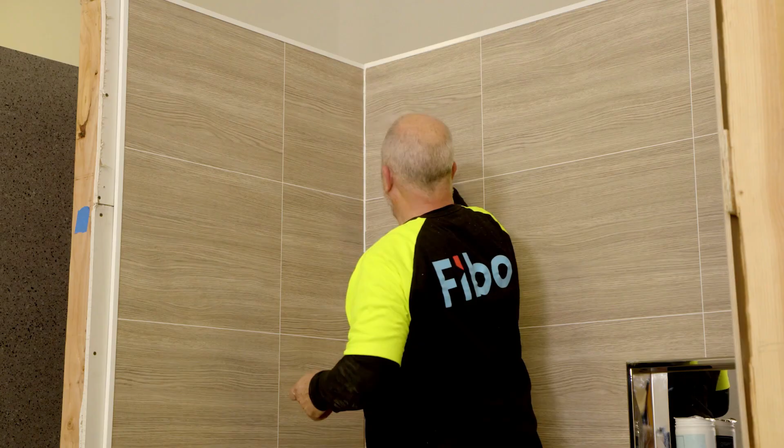So again, we're going to take our Fibo Clean and spray the whole length of the Fibo Seal joint, as well as either side of the panel, so we can lubricate it and the sealant doesn't stick to the walls. Remember, Fibo Clean evaporates quickly, so only spray as far as you're going to tool, and respray every time you go to touch the sealant. You can repeat the spray, tool, and apply steps as many times as necessary for a full joint and to achieve a clean, professional finish.

Okay, so now we've got the bottom sealed, we've got the corner sealed. We're going to follow the same process all the way around the installation. Same thing goes with the L profiles, finish sealing, what have you. It's all a repetition of the same process. You may also want to use blue tape here to hold the L profiles in place while the sealant is drying.

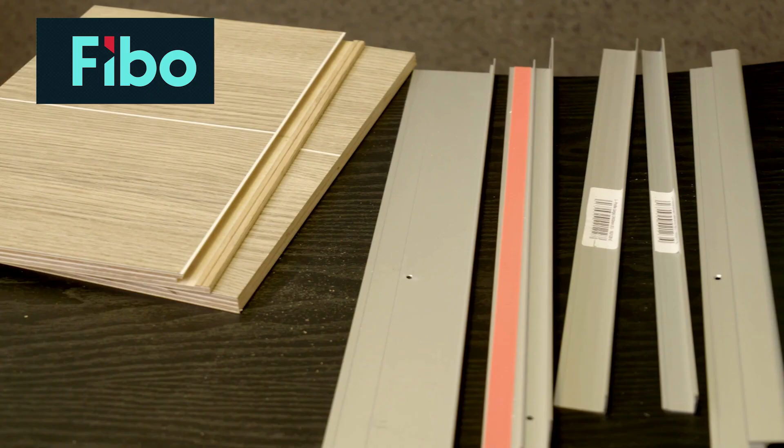This concludes the video demonstration of the basic steps involved in a Fibo alcove installation. While it does not encompass every situation you may encounter, it is a great place to start. We will be adding new segments and covering other details soon, and these will be offered in both recorded sessions and live webinar sessions as well. Our goal here is to give you the basic information needed to successfully install Fibo and pass the certification exam.

You can always reach out to me individually with any questions you have. And be sure to keep a copy of the Fibo product installation guide handy and refer to that as well, because the instructions there are quite detailed.

Let's review what we have covered and discuss some additional details. Any accessory that will bear weight, such as ADA grab bars, wall-mounted seats, toilets, cabinets, shower doors, etc., will require blocking in the framing. This blocking needs to be sufficient to bear the intended load the product is designed for.

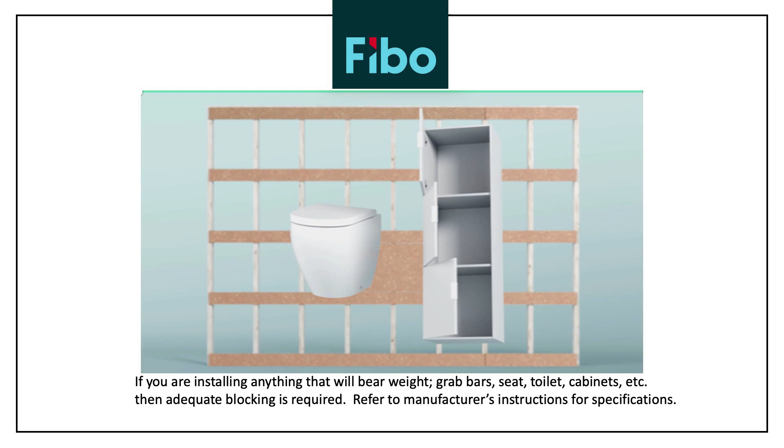Always refer to the manufacturer's instructions for these specifications. Typical back wall options are OSB strips over studs for screw-in or drywall for glue-up. This is needed to be able to bring the Fibo in front of the flange of your tub or base and allow the panels to sit above the deck. For the OSB strips, this will also give us a surface to screw into, as the end of a panel will likely not land on a stud.

OSB strips are most desirable as they allow us the opportunity to use shims to overcome any framing issues such as bowing, a proud stud, corners out of plumb, etc. You can also use full sheet OSB backing as material if you wish.

As mentioned, we can go over existing surfaces such as tile, and we have a separate set of instructions for this, which we can provide to you upon request. Remember to set the bottom of your OSB or drywall or whatever substrate it is that you're going to use 1/4 of an inch above the flange or deck.

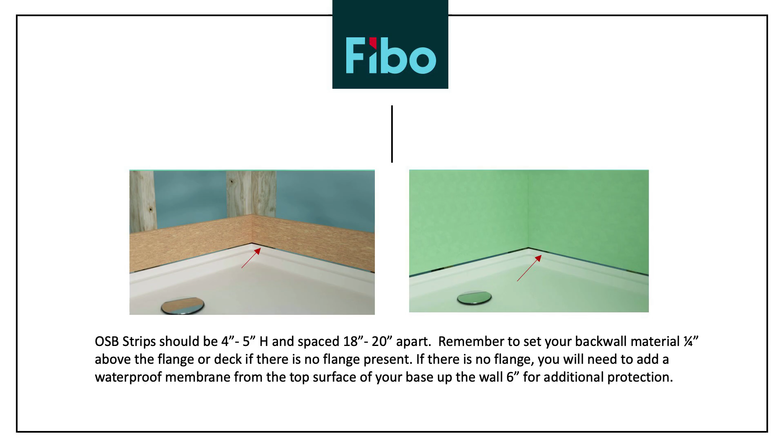There is only one place to apply the Fibo seal in the Aqualock click joint, and that is on the tongue or short side of the Aqualock, and fill the tongue completely, orienting the panel face up. Fibo seal does not go behind the panel.

There is also only one place to place a screw in the Aqualock, and that is in the milled vertical line on the long side of the Aqualock, the groove side, or the nailing lip. Do not overdrive these screws to the point where you blow out the back of the Aqualock itself. Snug to the surface is adequate, and the Aqualock compensates for the screw head in its design.

Always clean excess Fibo seal right away as you go through the installation. It is much easier and a lot less messy than waiting till the end. Fibo wipes can leave a residue on the panels when it dries, particularly with matte finishes, so you want to clean that as well before moving on to the next panel. That could be done by spraying Fibo Clean into a paper towel and removing that haze.

There is no substitute for Fibo Seal for sealing the cut surfaces and for your finish sealing or caulking. This is important in order to maintain warranty. If you're attaching anything to the Fibo panels, such as screw-on accessories, glass doors, etc., you can use silicone or whatever sealant is recommended by that respective manufacturer.

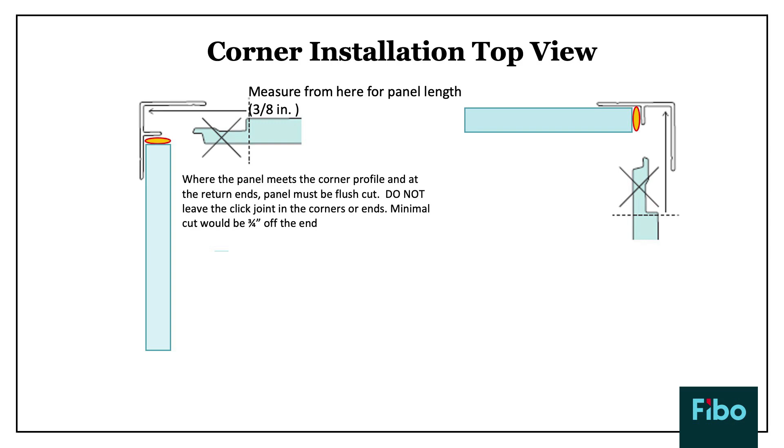We did not show this in our video demonstration, but I want you to see how to install an outside corner profile for a 90-degree return. For the last panel before the 90-degree return, you want to add 1 centimeter, or roughly 3/8 of an inch, to the length of that panel, as this profile has a channel that will slide over the end of the panel and help hold that panel to the wall at the end of the run.

In this instance, you will add Fibo Seal into the channel before installing to the end of the panel and on the return side as well. On the return side, you'll use the nailing flange to screw this profile into the adjacent return wall. This will keep the panel in place on the wall and also hold the profile in place while you install the next panel.

The Fibo screws will tap themselves, but it is best practice to pre-drill and countersink your screws. You will then continue your installation around the remainder of the room. One screw per OSB strip, or five screws evenly spaced along the length of this profile, is sufficient for fastening this profile to the wall.

Pipe penetrations and surface mount accessories. For valves, shower heads, etc., a standard hole saw bit will work just fine. You can use a jigsaw, a router, or whatever cutting tool you're comfortable using, but remember to be mindful that you don't chip the laminate.

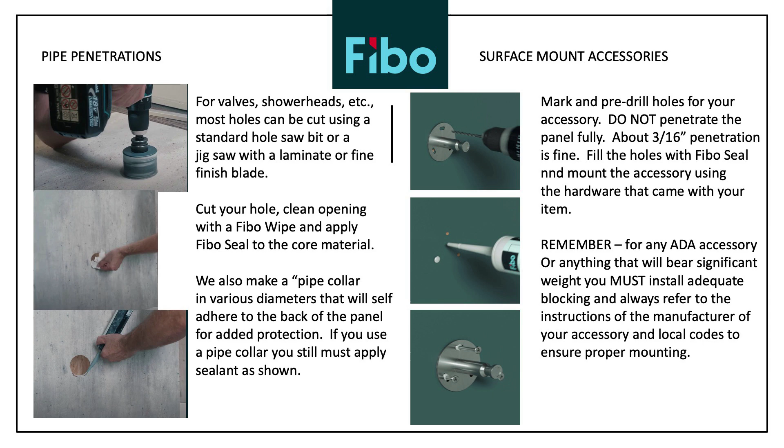Just as we did attaching the niche to the wall, we also want to use Fibo Seal, not only to seal the holes we cut, but also on the wall where your escutcheon or shower trim will sit. This is not to replace the manufacturer's hardware, but in addition to, in order to provide a watertight attachment.

When installing this trim, you should have excess Fibo Seal squeeze out from around the trim, and the cleanup process will be the same. This will ensure a watertight seal at your plumbing location and any other accessory you may have added to the wall.

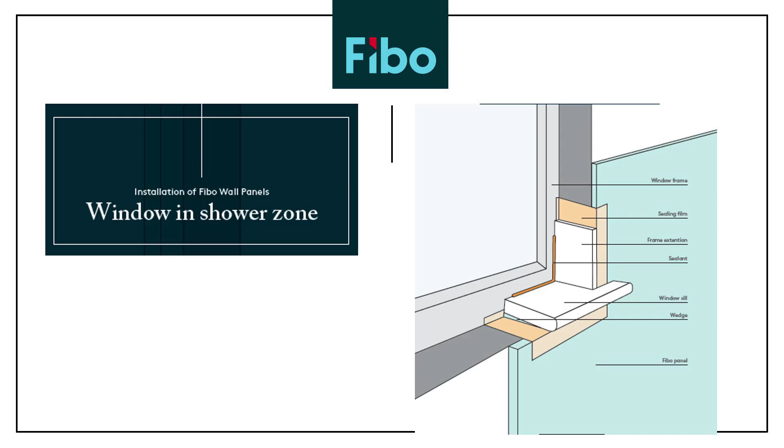You can install Fibo in an alcove that has a window. This illustration, found in our product installation guide, shows a cutaway view of how this is to be done. We have a separate tutorial for this, and that can be provided upon request.

Regular cleaning will keep your Fibo installation looking new for many years. We do not require any special cleaners for our panels. Standard cleaners such as 409 or similar will work just fine. It's also important to clean the sealant in the corners and base regularly to remove any residue from use. We do not recommend using bleach, as this can break down the sealant prematurely. Full care and maintenance instructions can be found on our website.

There's virtually no maintenance required other than regular cleaning. The grout line in our tile designs is a second layer of laminate that is routed into the panel during the manufacturing process. Therefore, there is no sealing of the grout or regrouting ever necessary to be done.

The finished sealant or caulking in the corners and at the base will need to be redone at some point. With proper care, exposed Fibo sealant can last as long as 10 years. Cleaning habits, the condition of the water, and the cleaning products used can all influence how long before this will need to be done.

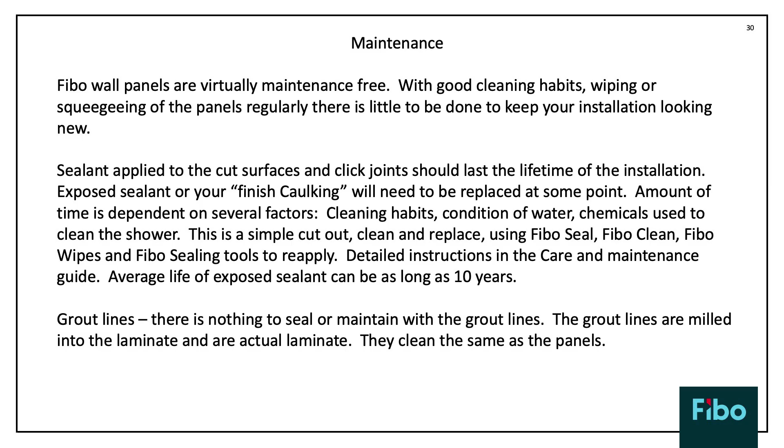This is a very simple cut out and replace process using Fibo Clean, wipes, Fibo Seal, and the sealing tools, and is a much easier process than if it were a silicone or some other type of sealant. Fibo Seal will stick to itself, so 100% removal is not necessary. Simply remove the affected sealant and reapply.